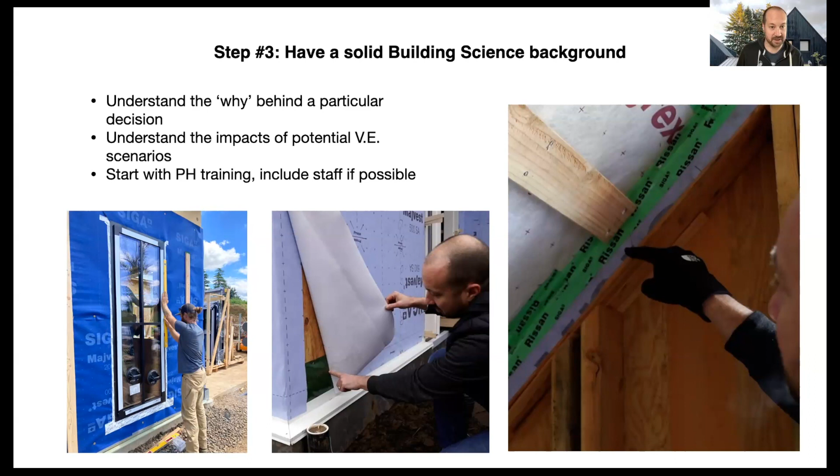Again, they're best practices, but you need to understand where is our primary water barrier and why is it the underlayment and not the roofing, right? Why is that? And so once you understand these things and you reach out and you have some of these courses, they can be absolutely invaluable. I took that CPHB course about 11 years ago or something like that now, and it really changed the course of my practice and my understanding. So highly recommend that. And then just marinate in passive house, right?

If you've got local passive house buildings in your neighborhood, in your area, even if you have to drive a ways, go check them out. Go lay your hands on these things. Go see them first person, right? See if you can find a mentor. Is there somebody in your neck of the woods or in your network that could work with you on this? And pick their brains, right?

Ask questions, be curious, really get into the why is it that we're doing this? Or how do I find that information? Asking those questions of that mentor can be really helpful. And get to know product manufacturers. These people can also be super helpful.

If you go to a conference and you show up and the SIGA booth is there, talk to the folks there. They're willing to help. This is a really great community. One of the great things about this community is that we don't tend to hold our cards close to our vest. It tends to be a very open and sharing community. And those product manufacturers are oftentimes really great resources to understand this before you jump into your first project.

So here's a quote from Scott Kosmecki, Portland, Oregon. He's got a company called Hinge Build Group, and he's got a panelized company called Resilient Framing Systems. And he says, give yourself a year or two to really study and absorb how the building science works, and then rely on your new friends to look over your plans when you think you are ready. I would never have been confident enough to build anything without the help of my network of Passive House friends.

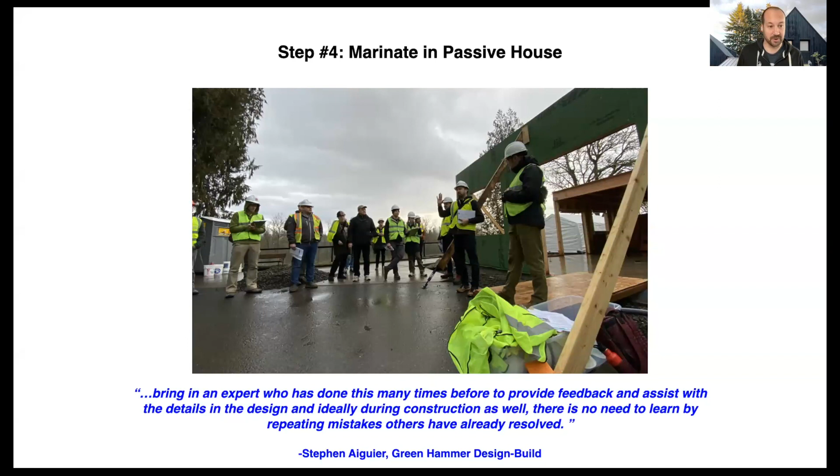So, don't go with a Guggenheim to start things off, right? If you have the opportunity, keep it simple. It's the KISS, keep it simple. As Stefan would say, keep it simple, silly. I kind of like keep it simple, stupid. Anyways, a lot of feedback from folks in my network about this.

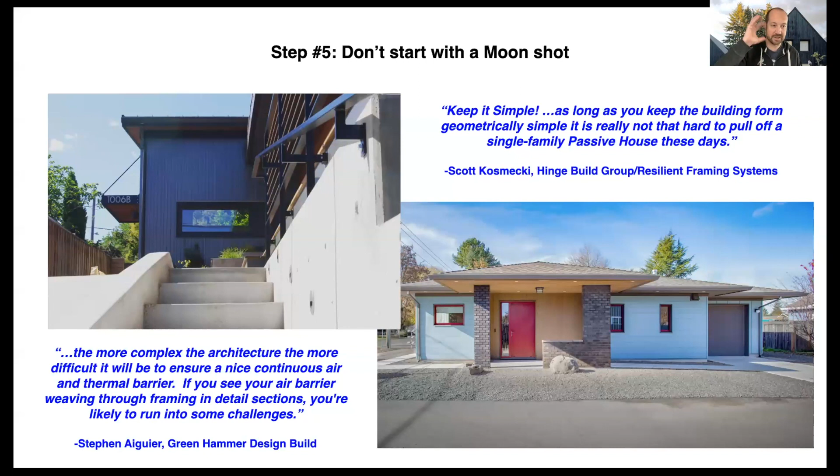Check out those plans, check out where that air barrier is. And if you see a whole bunch of origami happening, revisit that, think about that. Or if there's not really any ability to change that, zoom into that part of the plans and really get to understand it in 3 dimensions. So I think that's a really good quote there.

And so if you can, simplify your enclosure: less surface area to volume, less corners, less dormers, less bump outs. Those are all places where it's going to be difficult to hit that air barrier target. You're going to get thermal bridging, and it's going to get complicated and expensive. So if you're thinking about your first single family passive house, try to keep it simple, right? But also try not to make it look ugly. That's not something you want to do either.

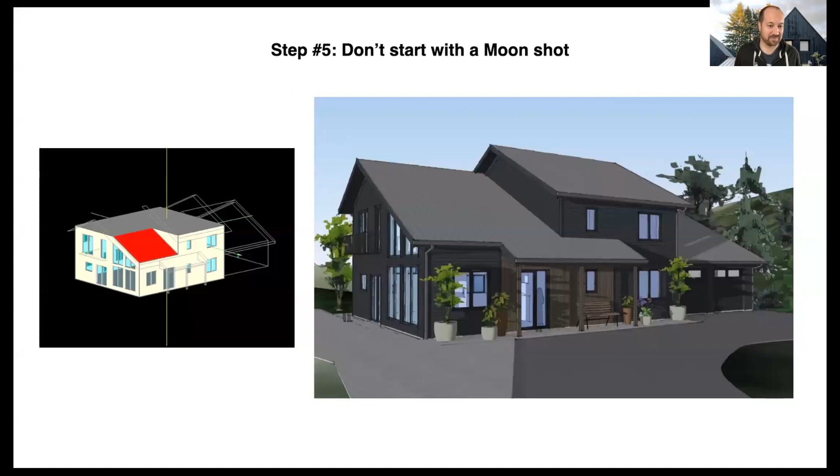So here's a quote from Jeff Stern, architect here in Portland, Oregon, from In Situ Architecture: keep the assemblies and the details simple, but don't forget about making beautiful architecture. I like to talk about country songs. They're extremely meaningful, but they might only be three chords, right? So think about that with your buildings too, and maybe your first passive house building: just because it's simple doesn't make it not interesting or meaningful.

This one I got a lot of feedback from others too, and I think is really important: get involved in the design stage as early as possible. Early, really, really, really early. If you're not a design build firm and you're working with a separate architect, hopefully the clients chose the architect and the builder at the same time. If you're thinking about building one of these for the first time, hopefully you all got in the room at the very early first conversations that started happening about this building.

All right. We want to look for issues about constructability. There's lots of things that I've seen architects draw that can't actually be built. Like that gutter that you tucked in between the pergola and the house looks great, but how do we actually get it in there? There's no way to actually get a screw or a driver in there, right? These are things that builders can bring into this conversation.

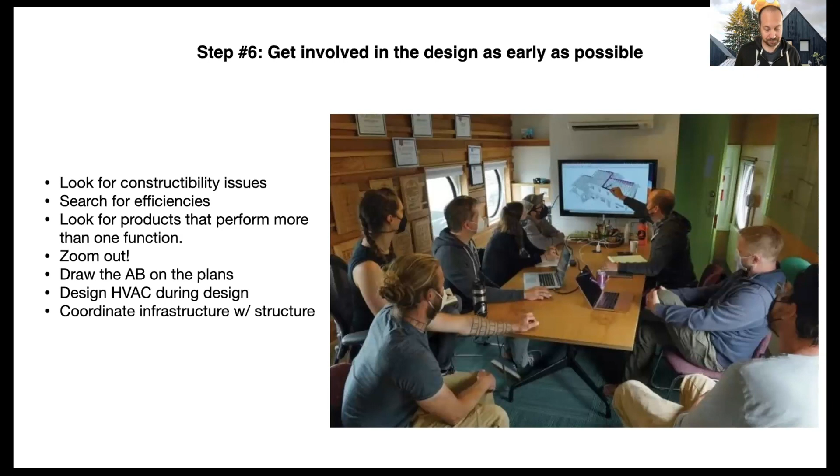So here's a picture of our team, kind of just drawing things on the board, having conversations, thinking about improving details. And this is from a quote from Alison Kwok from the University of Oregon: get your builder, your mechanical team, your client, and your CPHC together as early as possible. I got a lot of these comments from folks. And one of the things that we're doing here is just drawing out the 4 control layers, right? So we want to talk about where is our bulk water control, where is our air barrier, where is our vapor control layer, and where is our thermal control layer. And we're mapping this out and trying to find efficiencies and easy ways to build this and get this done cost effectively with less materials and less labor early on in the process.

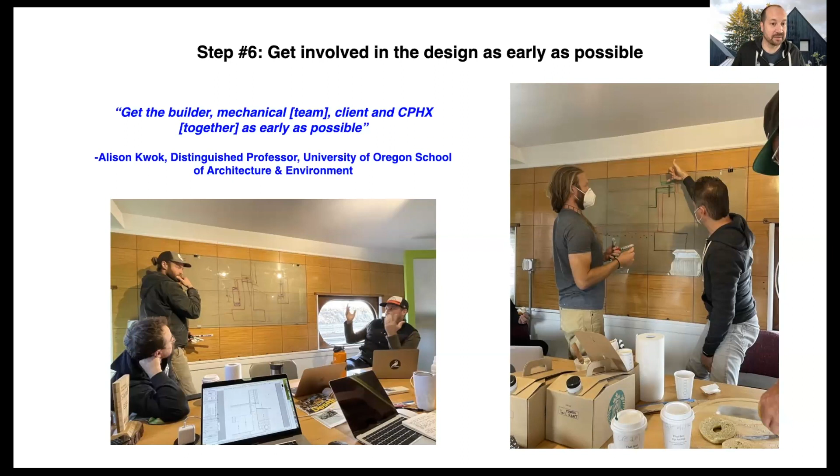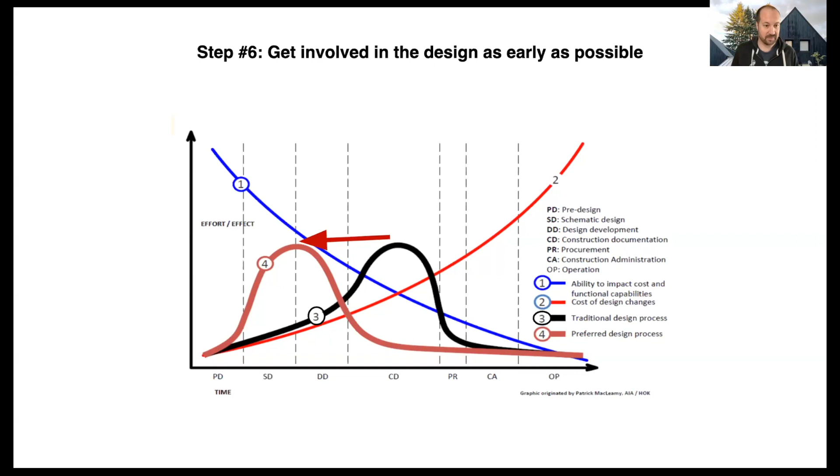Number 7, don't start in a hole. Don't bid low to get the job. I know it's tempting for the builders out there, the architects out there, the professionals. You might want to get your first passive house under your belt, but don't do this to yourself. It's not good for our industry. It's not good for you. It's not good for the long term. It is true that this might not be your best margin project, but make sure that you are making a margin and you're making a profit, like I talked about earlier, right?

There's definitely a learning curve. There's a classic quote in the passive house community: there's your first passive house, and then there's everyone after that. And now that we've built close to 8, 9 of these things, it's just become building. It's just what we do. And it's not really any more difficult. You really wonder what was so difficult about it. But there will be a learning curve the first time you do this, and understand that. Add time to your contract for delays beyond your control. There might be European products that get delayed in shipping.

You might need some extra time for fixing your air barrier after that first test if you didn't quite meet the metric. You're going to have to probably spend more time on quality control with your trades partners in their work. All that stuff is going to take a little more time compared to traditional construction. So give yourself time for that.

And don't be penny wise and pound foolish. I see this happen quite a bit with people that are doing this for the first time. And I see them spend way more time and effort and don't end up with a product that's as good because they decided to cheap out on a particular product or system or something like that.

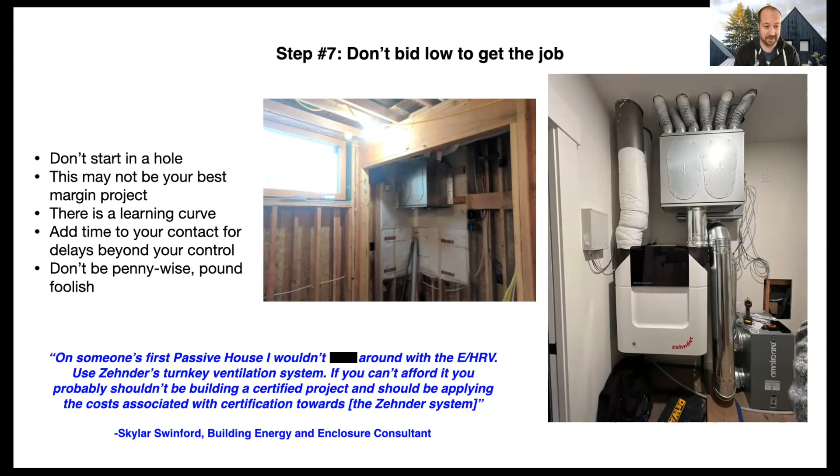And if this is your first time, you may want to consider something like that. This is from Tessa Bradley of Artisans Group. She says, I see builders either spend so much time on the passive house bits that they overshoot the performance goals, which is admirable. But for me, I would want just over the certifiable limits. To me, this means that I got the best house I could without overspending on my construction budget.

So I think what she's trying to say here is there's no need to break air tightness records, especially on your first one. You don't need to roll that tape out 6 times and sit there with a magnifying glass to make sure you've got every last thing. Get it to the point where it needs to be. This is building. Make your test, get through it, right?

You can waste a lot of time and effort, and especially on your first build, it's very tempting to really get into those details and really make a bespoke craft of your air barrier or something like that. If it's your build and it's your dime, maybe go for it, right? But if it's on a contract for somebody, it might not be the time to do that.

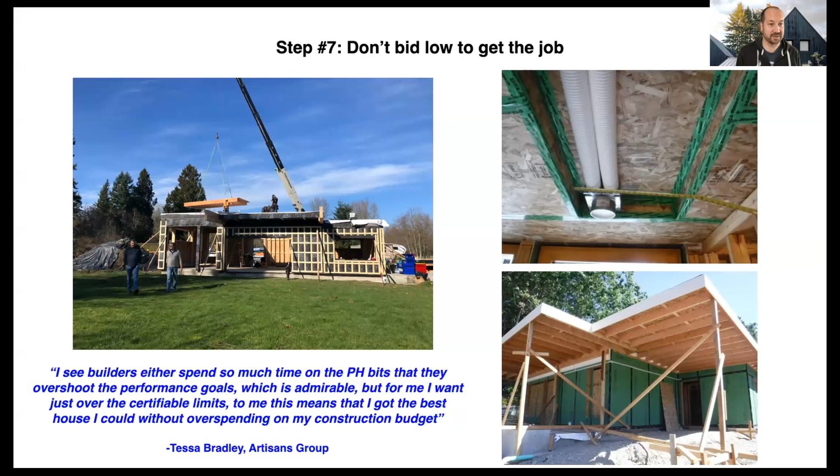Unknowns, step 8, we're on to 8. So known unknowns. So there are things that we know that we don't know, right? There's things that we don't know that we don't know.

I think this is actually a Donald Rumsfeld quote. The only good thing that guy ever did. Came up with a good quote.

So, don't get surprised. In the first passive house we built, during the final inspection, it was a PHIUS project. The rater said, okay, cool. It's time to test your hot water. And I was like, what do you mean test the hot water? I had no idea. This was 10 years ago. You have to be able to raise the temperature of the water 10 degrees from the furthest fixture from your water heater within a half a gallon of water.

I had no idea. And so we walked over to the sink. They got out their half gallon jug, put the thermometer underneath the thing, turned it on, and luckily it raised 10 degrees before we got to that half gallon. And I was just like, oh my God, I had no idea. So nowadays we're designing this. We're actually mapping it out and doing the calculations to make sure that we will meet that, because you will fail. You will not get your certification if you fail that thing.

So, work with your rater, work with your mentor, get to know these things. Say, hey, what don't I know? Right. That's going to be super important. Another project we had, for PHIUS anyways, you have to meet these prerequisites of WaterSense and Indoor airPLUS and Energy Star. And as part of that Indoor airPLUS, you can't use any added urea formaldehyde products.

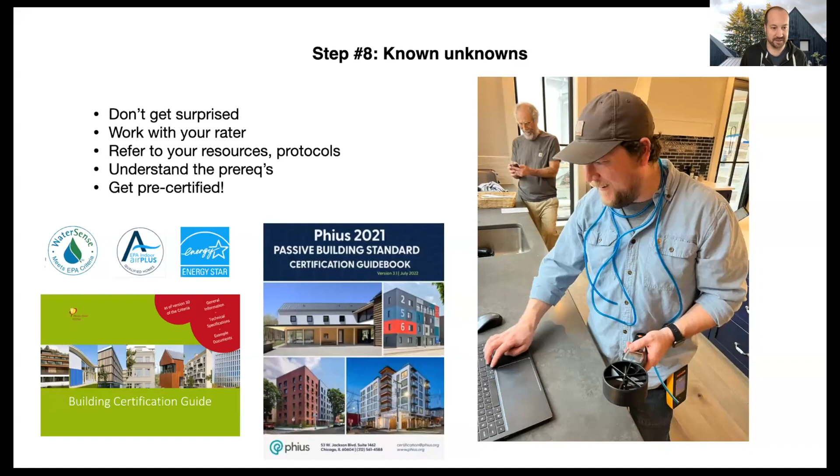So on to step 9, be strategic. You really got to have good project management, right? You got to have good schedules, work out a Gantt chart, good communications between your team and your clients and your trades, have the software in place, know your budgets. Good project management is going to make for a good first passive house build.

Run a clean job site, right? Have job site meetings, do them often, do them with your team, your trades, whoever it might be. Post signs on your job site, right? There's a classic one right here, the airtight building, right? So report all damage to the building supervisor. Put those things up so people can see it,

so that your trades or whoever, the plumber's helper who just got hired last week shows up. The most dangerous tool on a job site is the utility knife, right? Someone could just slash your air barrier. If they don't know this, if a plumber is like, I need to get in there because I have to make a connection, they're going to use that utility knife. So make sure that you're posting these things and make it obvious for people.

Trades education, right? Maybe you could send your staff through the certified passive house builders training course or whatever it is. Get them educated before they show up. And document changes, maintain records with photos. So easy nowadays, everyone's got their little rectangle in their pocket. Take pictures, document all this stuff so that if something comes up later and your rater says, hey, did you insulate this rim joist over here? You can be like, oh, here's a photo of it, right?

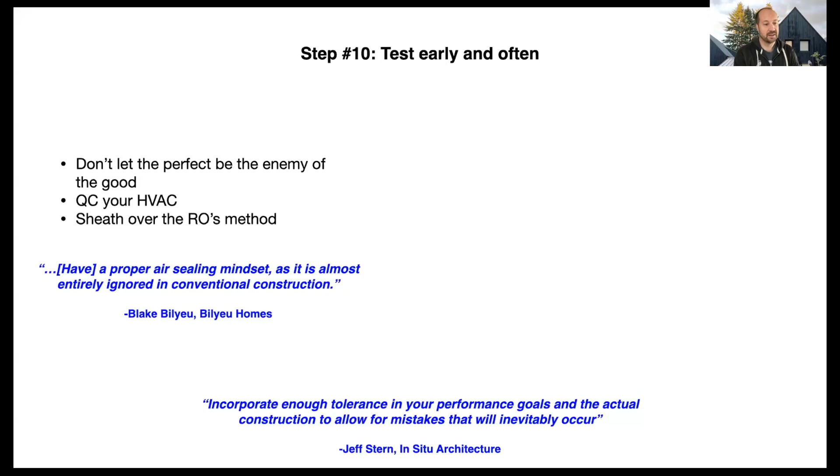Oh, there it is. The really cool thing, if it's your first project, is just to sheathe directly over your windows and doors and everything. Here's a picture of this. I'm forgetting the name of the method. It's a guy who did this for the first time. I'm blanking at the moment, but they're actually taping the entire air barrier over their windows and doors

and all the punched openings and everything like that, and then testing it to make sure that it meets it, so that when they do cut in the windows and they test again, if there's an issue, they know that, oh, it must have been our window install. So kind of an interesting way to do something for your first passive project.

So Blake Bilyeu from Bilyeu Homes down in Salem, Oregon, said to have a proper air sealing mindset, as it's almost entirely ignored in conventional construction. Super true. We frame all of our buildings in-house at our company, and we talk about air barrier first framing as our style of framing. Get into that mindset of thinking about air barriers all the time.

Jeff Stern again from In-Situ: incorporate enough tolerance in your performance goals and the actual construction to allow for mistakes that will inevitably occur. True. Like if your energy model says you'll meet passive house if you reach 0.03 CFM per square foot or 0.3 ACH50, and you have to, in your first one, get less than 0.3, that's not a great strategy.

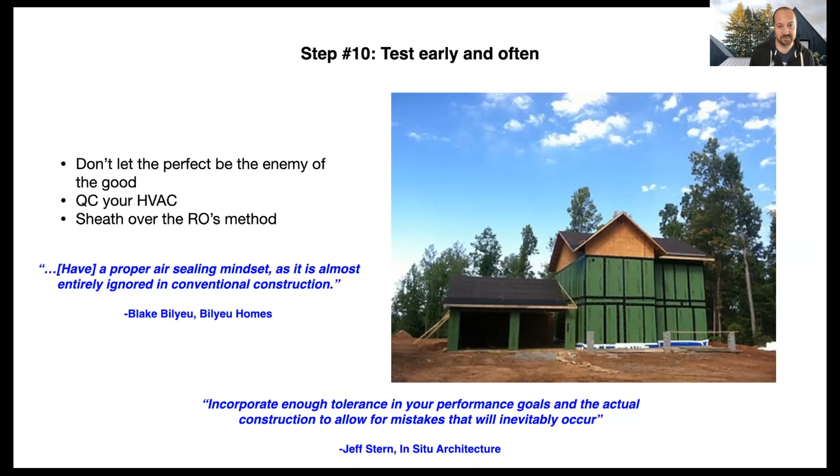And so a couple of quotes, Blake again: air behaves like a fluid. Prior to insulation and drywall, it helps to walk through the house, scrutinizing the exterior envelope and imagining that the interior volume of the home is filled with water. Are there any leaks to the outside, especially at intersecting planes and material changes, that need to be addressed that won't otherwise be later dealt with by a separate air barrier membrane, etc.?

Before you insulate, before you cover, test. It's going to be a requirement through Passive House, but you're probably going to want to get a blower door or get a friend with one and test it often at that stage while you can still make changes. Because once you cover that up with insulation and drywall, you can't get back at that air barrier.

So Skylar again: on early Passive House projects, I lost hours and hours of commissioning ERV, HRV systems with poorly conceived and executed duct systems that also had noise issues as well. Yeah, great point about the noise. If you don't get these things right, the static pressure and your diffusers and all that stuff, they will be noisy. They won't deliver and you could potentially fail.

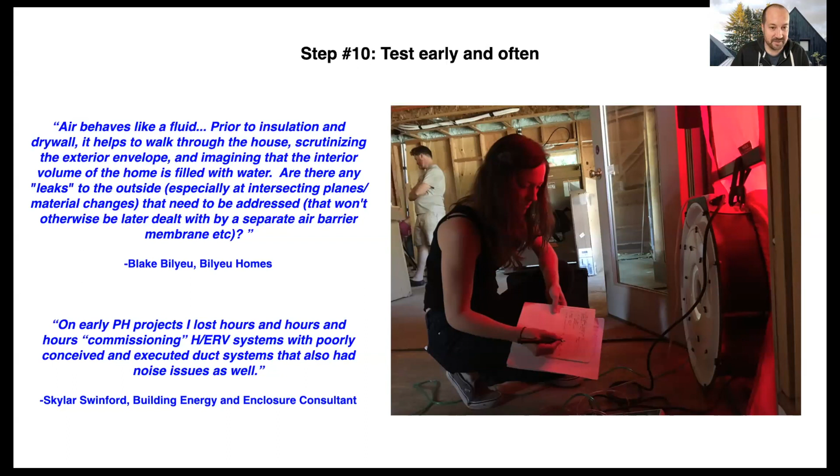Back to what I said earlier, the biggest source of failure I often see, besides not hitting the air tightness goal on first-time passive houses, is the HVAC system. So get to know your HVAC. And I'm going to turn it up to 11 here. I know it was 10, but I'm going to 11. I'll be quick about it.

Make sure you job cost afterwards. Build institutional knowledge for your team, yourself, your local trades, and your local region. Post your mistakes, share your mistakes, and tell others. So in that spirit, here's a mistake we made. On the top left here, you see that little flap, the floppy bit, this is the top plate of a house that we're building right now.

We set the trusses on that gable wall, and we forgot to put the air barrier underneath and over that top plate prior to setting that gable end truss. So we had to pry the thing up and shimmy our air barrier beneath it to get it right again. So spend the time to make sure you're putting that stuff on over your top plates if that's the route you're going for your air barrier. But I think it exemplifies that point.

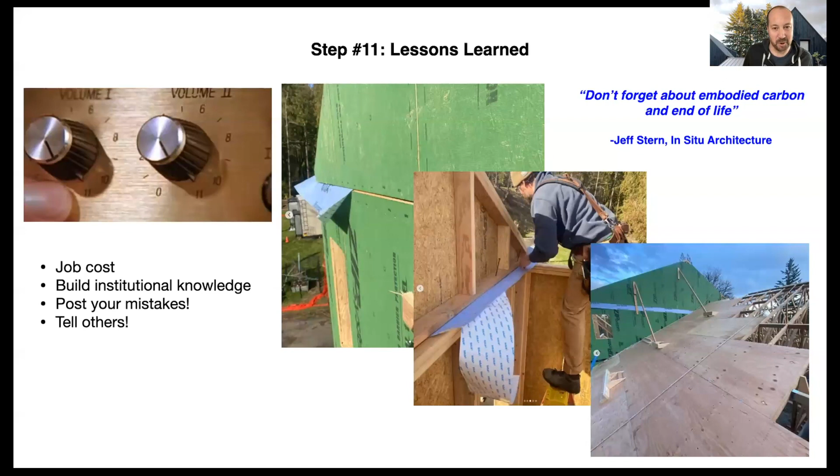Post your mistakes. Hopefully people will learn from that. And one of the great things about our industry in the passive house world is that people are open to this. And I think it's really valuable to share these things when we get the opportunity.